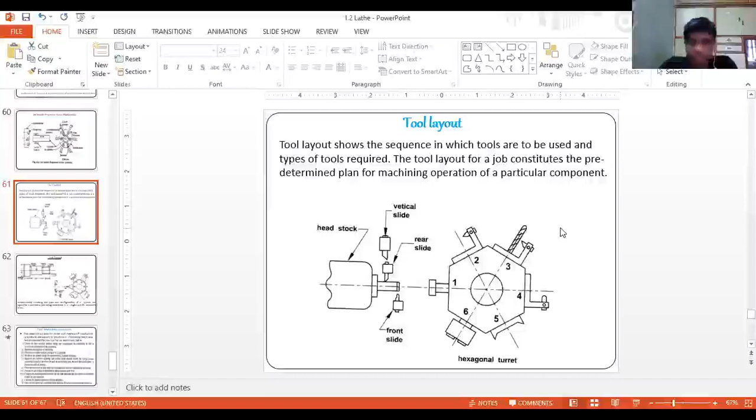So one small portion is left out. That is tool layout. So what is meant by tool layout? Normally tool layout is required for lathes, automatic lathes, or maybe turret and capstan lathes. So tool layout is nothing but, if you see in this picture, what is this? You can see this hexagonal portion.

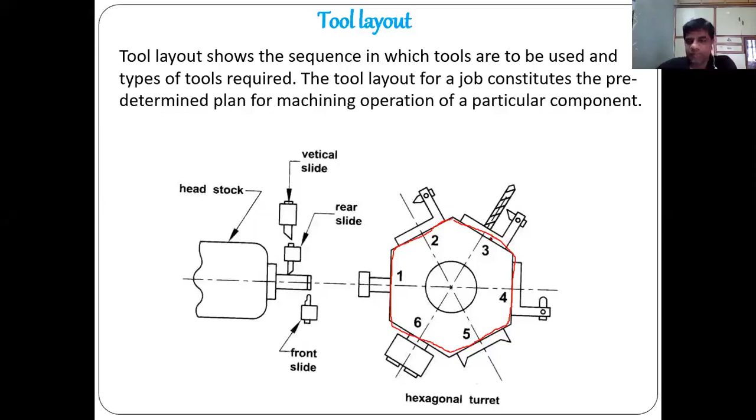Can anybody tell me what is this hexagonal portion? Last class we discussed this hexagonal portion. Can anybody tell me what this portion is? So we discussed some hexagonal last class, right? So this is nothing but the turret.

So you see, the headstock is clearly mentioned. This is the headstock, and this is the workpiece. This is a chuck, and in this chuck the workpiece is mounted. On the other side of the headstock, normally we have a tailstock on the lathe, right? But last class we have seen in turret, capstan, or automatic lathes, we replaced this tailstock with this kind of hexagonal turret. Sometimes pentagonal or octagonal turrets will also be there.

So in this turret, what happens? In hexagonal, we have 6. Actually, this is the top view of the lathe. Perpendicular to this screen, there is one more length. So this is actually a hexagonal block. In this block, 6 sides are there. Each side is a surface, and on each side we are mounting one tool.

In the previous lathe, we used to have a tailstock. In a normal center lathe or engine lathe, on the tailstock we normally fit a center, and that center supports the workpiece. One side the workpiece is mounted on the chuck, and the other side is supported by this center mounted on the tailstock, for very long workpieces. But for short workpieces, the tailstock is not required. So in capstan and turret lathes, they replaced the tailstock with this kind of hexagonal turret.

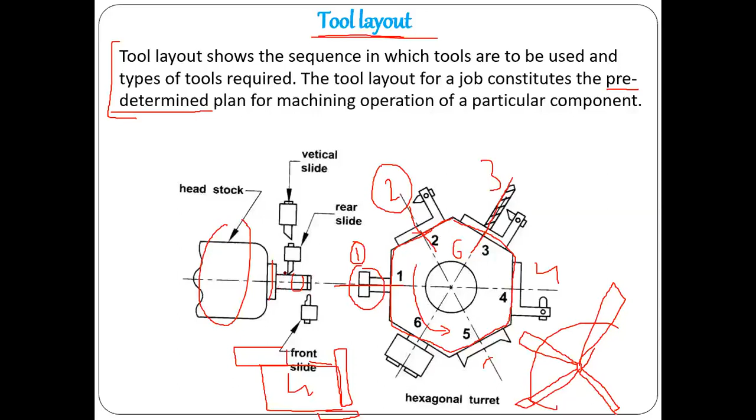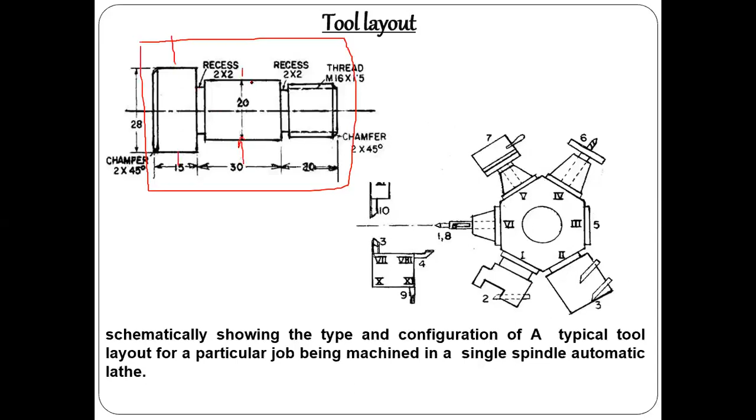So for this operation, you can take a workpiece of a particular diameter. Here it is 28 mm diameter. So you need to have a raw material of 30 mm diameter because some finishing has to be done. So 30 mm diameter, and how much length is there? Length is about 30 plus 20, 50, plus 15, right? So 65 mm is required. Maybe 5 mm more you can keep here. So if you take about a 70 mm length and 30 mm diameter rod, you can make this bolt.

So how do we make this bolt? Once it is inserted into the chuck, the operations are performed one after the other. You can see here, this is a tool post. For a square turret, the tool post is replaced with the square turret. So 4 different planes are there, and each plane has a different cutting tool.

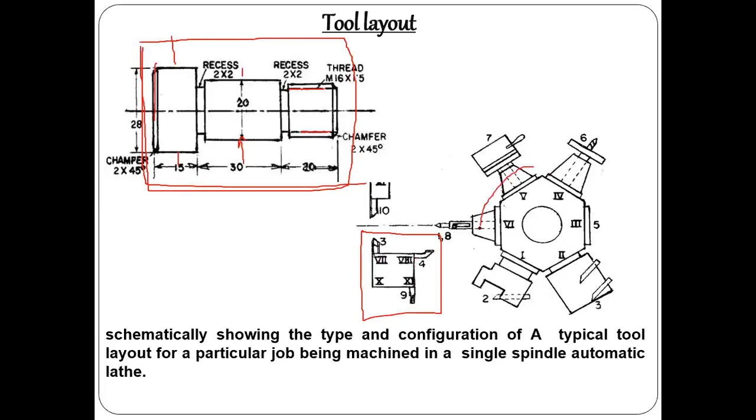Similarly, this is your tailstock. The tailstock is replaced with the turret. In the turret you have a hexagonal turret, so 6 different kinds of tools are there. Whatever operations you need to perform, these tools perform them as per the sequence of operations.

For example, I'm drawing one image here. This is nothing but the raw material we have, right? So we need to manufacture a bolt of how much diameter? The bolt diameter is 20 mm, and on that you need to have threading. An M16 thread has to be made on that 20 mm diameter, right? So this is the typical raw material you have.

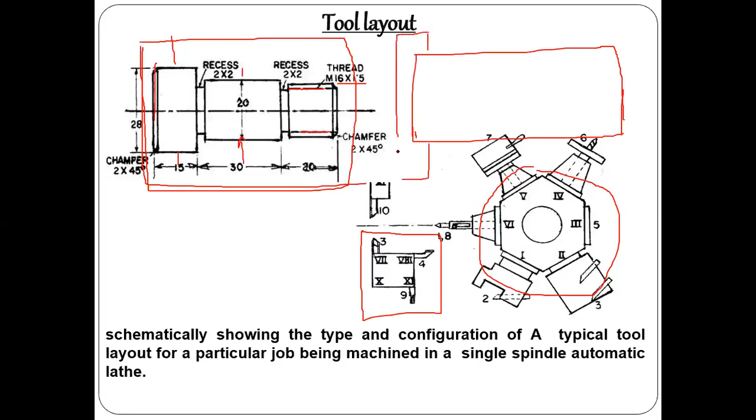So this you need to insert into a chuck, right? Whenever machining, normally the length of the workpiece has to be a little more, so that some portion can be gripped in the chuck. So assume it is 10 mm. 10 mm is gripped, and about 70 mm of workpiece is there. So initially you take 70 mm, and the diameter is about 30 mm. From this workpiece you need to manufacture a bolt, which you can see in this direction.

So this has to be converted into this one, right? This is production. What is production? Converting raw material into the finished good. That is called production. So this is also one of the production processes. So this is the raw material given to you: 70 plus 10, an 80 mm rod, 80 mm long and 30 mm diameter.

So from this you need to make a hexagonal bolt or a square bolt, whatever you can see in this picture. So how do you need to do it? Simply insert the workpiece into the chuck. The chuck is holding it. When you start the machine, it starts rotating, right?

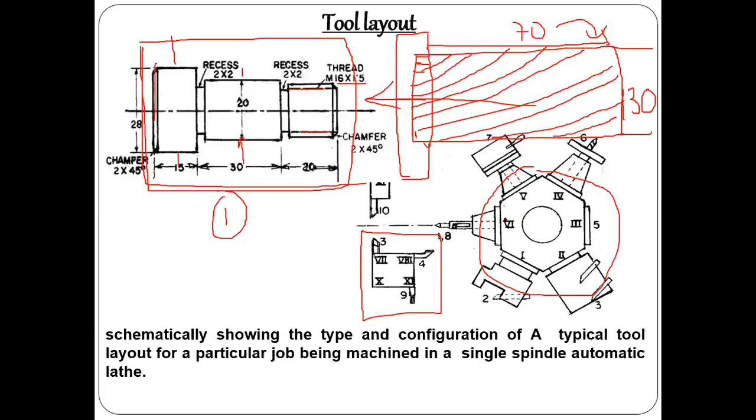Because this is only 70 mm, a short workpiece, we do not need any kind of tailstock. We do not require a second support. So the tailstock is replaced with the turret, right? So now which operations, in which sequence they have to be performed, as an engineer, as a designer, you need to decide, right?

So initially itself you've decided what kind of things you need to make. So initially you need to do the plane turning operation, you see here. So whatever tool is there, this is used for plane turning. So initially whatever the 30 mm is there, you need to reduce it to 28 mm. So entire workpiece you reduce to 28 mm, performed by one tool. So the first tool performs that operation.

After that, what we need to do? This portion remaining, you need to leave 15 mm because this is the head portion for holding, and remaining portion 30 plus 20. So this 50 mm diameter, 50 mm length of the workpiece, you need to reduce it to 20 mm diameter. After finishing this one, removing 15 mm, then remaining portion you need to reduce to 20 mm.

So there is a sequence of operations which you are performing. You reduce it, and the remaining portion you are cutting to this particular size, making it 20 mm. So after that, once you made that one, the second operation, what you need to do?

You need to make a threading on this. But before threading, because threading you need to have a different tool, some other tool is there. So this tool maybe is a threading tool. Once the plane turning is over, of entire portion, including this portion, then immediately you need to rotate this. When it rotates, this tool is coming this direction, and this tool is coming forward, ready for machining to make a thread on this.

But normally threading involves high forces. So in that case, even though it is a small workpiece, you still need to have a support. So here, one drill is there. Immediately after this is over, this portion comes forward and makes a hole in this. A small hole is made.

Then you need to have a support. So here maybe you have a center. This is actually not a cutting tool, it is only a center which supports the workpiece. So this workpiece, whatever goes back, this will come forward and hold with this. So this is the fourth operation, holding and rotating.

In that rotation, whatever tool is there, this threading portion is already coming here, and this starts making threads. So thread cutting operation is given. During thread cutting, simultaneously you are feeding as well as rotating. The feed is directly synchronized with the rotation of your workpiece. This is done because this is an automatic machine, an automatic lathe.

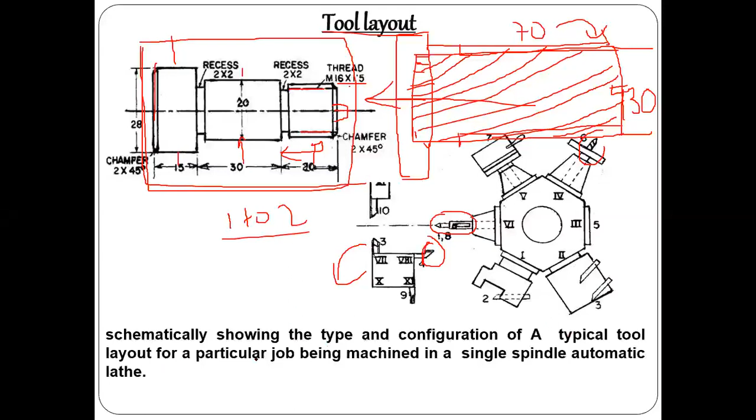So schematic showing here the type of configuration of a typical tool layout for a particular job being machined in a single spindle automatic lathe. Let me erase all these things, and assume the work is ready now.

From the raw material you have, you make this bolt. You see here some kind of numbering is given. When you're designing anything, you need to design the process also, which kind of sequence it has to follow. So numbering is given here and here, and as per that number, your operation is proceeding.

First is nothing but holding, because even though it is a smaller workpiece, you have a center on this giving it some kind of support. That's one. Second operation is nothing but making a facing, once you've given this support. The second operation is giving like this. You can see some kind of sequence of numbering is given.

1, 2, 3. 3 is here and also 3 is here. This means you can do the facing parallel - facing by this one and plain turning by this tool. So even sequencing also can be possible on this.

So tool layout is one after other, whatever sequence you are giving. Third one, then the fourth one is here - once your facing is done, this is a threading operation, so then after that you need to go for threading. That's 4. Then the 5th is one more - this one, nothing but finishing this face.

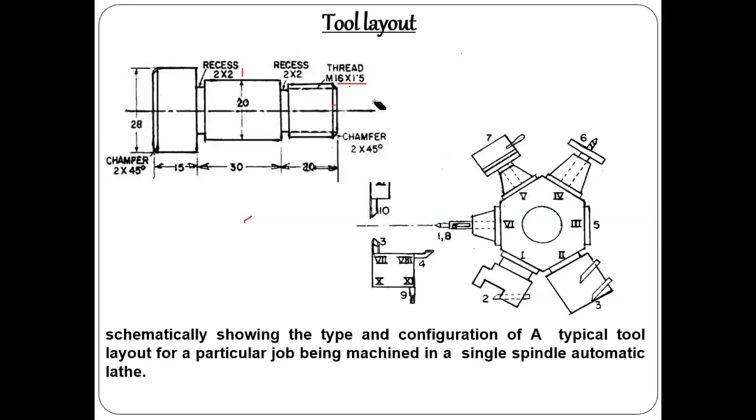So next slide, you can see detail about tool layout. This is something you can note down - a predetermined plan for order and method of machining operations necessary to produce it. Whatever the tool or manufacturing process or machining you are planning, that is given by this tool layout.

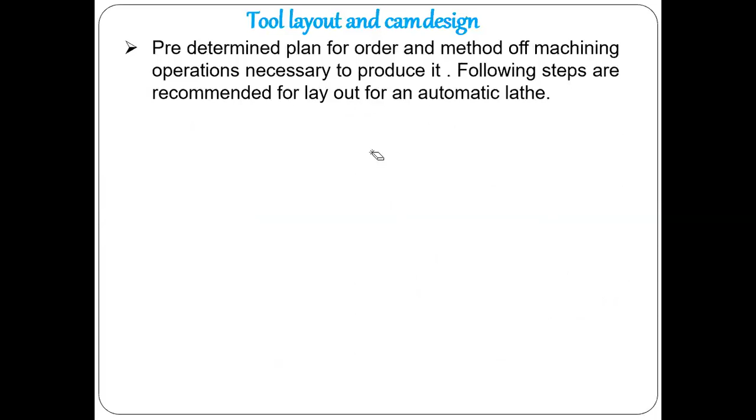Following steps are recommended for a layout of an automated lathe. For example, in an automated lathe these sequences of operations are involved - almost 10 sequences, step-by-step processes are involved. First, you need to choose the best available machine, right?

First you need to choose the machine, because when planning for manufacturing, in a factory or shop floor you have a number of machines. You need to decide which machine does which operation - which machine manufactures bolts and which manufactures other components. First you need to choose the best available machine, taking into consideration availability as well as economical manufacturing of the component - where you can manufacture fastest, what production rate you need, how much the product costs.

So based upon the accuracy needed, you choose the machine - what is the best available machine. Then determine the sequence of operations. This sequence of operation is based upon deciding which tool has to mount on which surface and side, whether it's mounted on the tool post or mounted on the turret.

So choose the available standard tooling as far as possible. Once your sequence of operation is decided, then you need to select available tools. Then decide on any possible design of special tooling if needed. If you're manufacturing a special component, you need some kind of special tooling - if that special tooling is required, you need to decide and buy it from the market.

Otherwise, you can give the order to manufacture special tools, based on the machine capability and surface finish desired. So decide the cutting process and the parameters for each tool to be used.

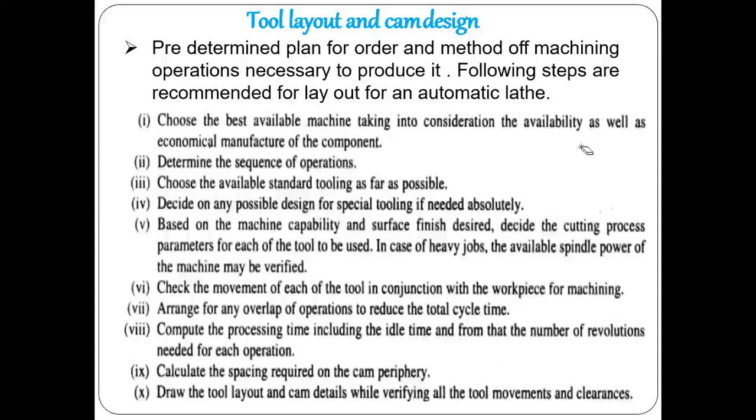Now it's coming to some specifications which we need to measure, so machining calculations. What we are seeing till now is different kinds of operations, description of lathe, different operations, holding mechanisms, tool layout - all these things. We're not looking at the problems yet. Now we are coming to the problems, so numerical problems also may come in lathe. In that, basically whatever parameters we have seen - we discussed this in the previous chapter on metal cutting, and the lathe is also one of the metal cutting processes.

So here also we have 3 different specifications required: speed, feed, and depth of cut. Speed is nothing but spindle speed - the speed at which your jaw, or your spindle, is rotating. Spindle speed can be called V, cutting speed, and also number of rotations. How many rotations your spindle or chuck jaw is making in one unit time, per minute or per second, is represented by N. So N is revolutions - how many rotations the spindle is making - and V is cutting speed.

So cutting speed is nothing but linear speed. So even though it is rotating at a particular RPM, some linear speed will be there at the surface. So that linear speed is nothing but your cutting speed. Then D naught is nothing but the outer diameter, the diameter of the workpiece when you keep the workpiece in the chuck. Whatever the initial diameter, that is given as D naught.

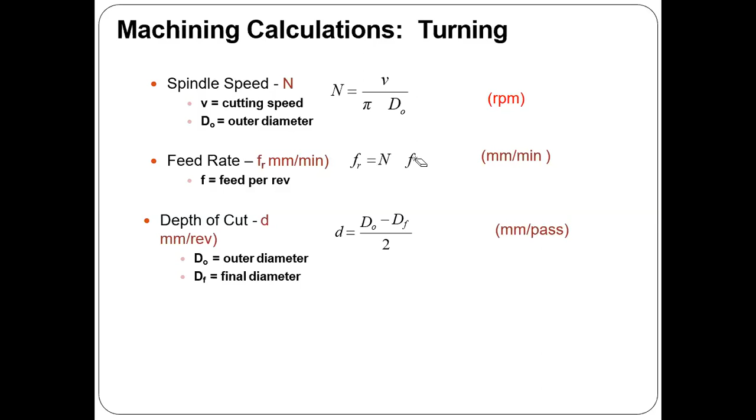Then coming to the important parameter in lathe, in any machining, is machining time. This is also the most important thing. When you're designing anything, how much time you take to manufacture the product, after how much time you're ready with your component, that you have to know, right? So machining time is a very important factor to measure.

Machining time is very simple: length of the piece divided by the feed rate, how much feed you're giving per unit time. That will give you the time of machining of a particular object. Because your feed rate is feed per minute, the time comes in minutes. If you give feed per second, then you get time in seconds.

The next important parameter is material removal rate: how much material you're removing from your piece. That's also one of the important factors. Material removal rate is very simple: your cutting velocity into feed, both in unit time, into depth of cut. Normally for other parameters, depth of cut we consider as d.

But here, if you're giving depth of cut on one side, because your workpiece is continuously rotating, automatically the other side of the material is also removed. That's why it's taken as 2 into d. So 2d gives you the actual depth of material you are removing. On the circular object, one side you remove depth of cut d, and the other side also d. That's why we take 2d.

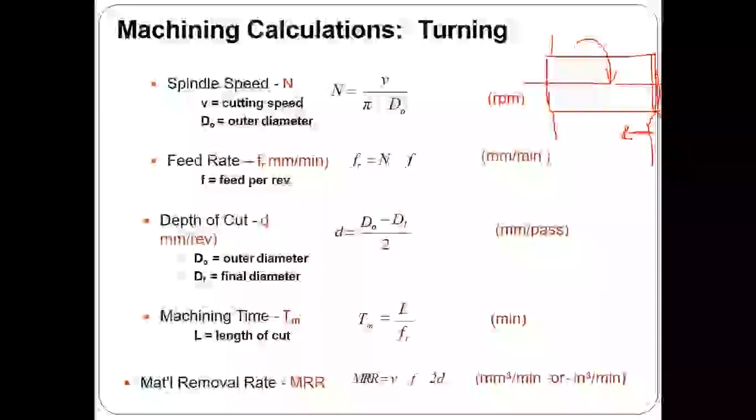So when the workpiece revolves once, how much you are moving your cutting tool in this direction is considered the feed per revolution, right? So at every revolution you're moving your cutting tool in this direction. For example, this is the starting position, and when it comes back to this initial state, one complete revolution is there. In that one complete revolution, how much the tool moves in this direction is your feed per revolution.

So in one revolution maybe you are moving about half a mm. That's feed per revolution. And how many revolutions is this workpiece making in unit time, maybe 1 minute? For example, it's making 30 revolutions in 1 minute, right? So 0.5 mm per revolution into 30 revolutions per minute means in 1 minute this tool moves 30 times in this direction, 0.5 mm each time. So 0.5 into 30 means about 15 mm you are moving in this direction per unit time.

So this is the speed at which your cutting tool is moving parallel to the axis, called the feed. And how much you are moving per unit time is called the feed per minute. Feed per revolution, f, multiplied by the number of revolutions per minute gives you the feed rate. Rate is nothing but per time, so how much feed you give in unit time, here a minute. So feed per minute is N into f. I hope the student has cleared his doubt.

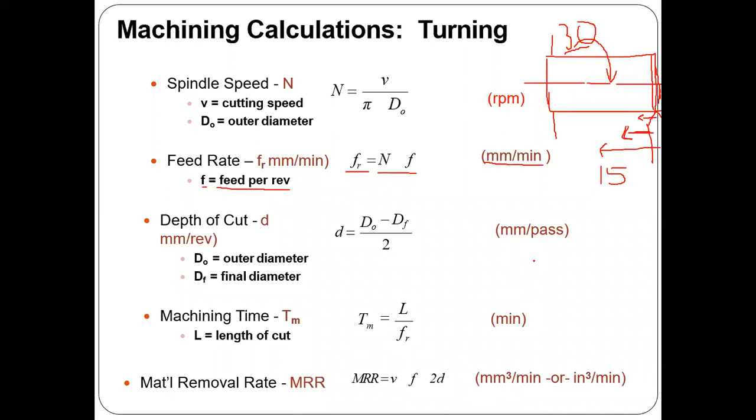Yeah, so now for still better clarification, we can take up one problem. With the problem, maybe you can understand still better. This kind of problem may come in your exam. A mild steel rod of 38 mm diameter and length 100 mm is machined on a lathe. So here a workpiece of 38 mm diameter and 100 mm length is there.

So raw material is available, and we need to cut it into the required shape. The feed is given as 0.1 mm per revolution, and the job rotates at 30 rpm, so the workpiece is rotating at 30 revolutions per minute. If the final diameter is machined to 35 mm in one pass, calculate cutting speed, feed per minute, depth of cut, material removal rate, and time for machining.

So all five parameters we've seen previously, they are asking now. So how to calculate? All the things are there. We have the initial diameter of the workpiece, the initial length of the workpiece, the feed per revolution is given, and the number of rotations N is given here.

So n is 30, and the final diameter is also given. So df is 35 mm, right? I think almost everything is given. It's asking about cutting speed, feed, depth of cut, material removal rate, and time for machining. So how to calculate? This kind of question may come for 5 marks or maybe 10 marks. It may not come for 2 marks because it asks for more parameters. But this problem is a very simple, straightforward question. There are not many complications in it.

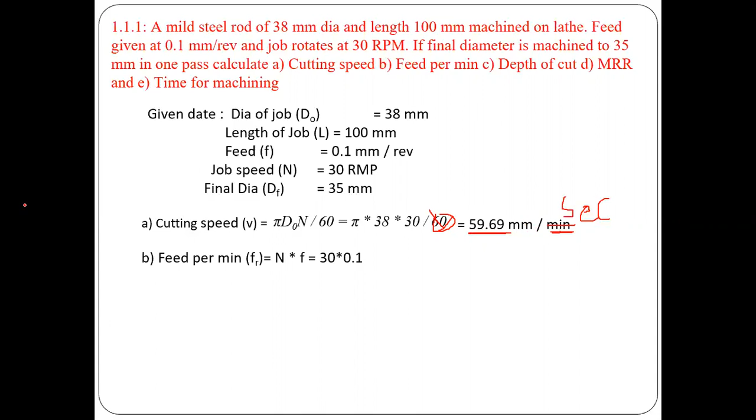Then coming to b, feed per minute. Feed per revolution is already given as 0.1. To calculate feed per minute, simply do n into f, the number of revolutions in 1 minute into feed per revolution. That will give you the feed per minute. So feed per minute is coming 3 mm per minute.

Right? Then coming to depth of cut. Depth of cut is normally per pass, not per minute or per revolution. In a lathe, depth of cut is given per single pass. Here the question itself says single pass, so in one pass the depth of cut is the same. Depth of cut is the initial diameter minus the final diameter divided by 2, so 38 minus 35 by 2. This value comes to 1.5 mm per pass. So for example, the initial diameter is 38 mm, right?

And final diameter is given as 35 mm. So if final diameter is not 35 mm, for example, final diameter is given as 30 mm or maybe 32 mm, then your feed may change. Normally feed is constant, but your number of passes may increase. So initial one pass, 38 mm is converting into 35 mm, and second pass 35 mm is converting into 32 mm. Means you need to have 2 passes. It's not in one pass; you need to make it in two passes.

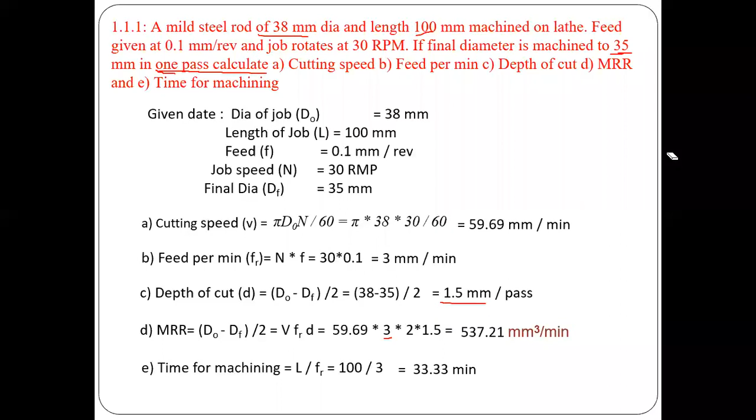Okay, let's move to the next slide. Since almost your syllabus is completed as per the syllabus, what I will do is take up my usual practice of going through last year's questions. You need to answer these now because these topics are all covered.

This first question is from the last year question paper, December 2019: differentiate between capstan and turret lathe, for only 2 marks, not 5 marks. This is one of the most common questions that may come in the lathe section, for 2 marks or even 5 marks.

So can anybody tell me what is the difference between capstan and turret lathe? We discussed this only in the last class. What is capstan lathe and what is turret lathe?

In the turret lathe, we can perform many operations, sir. Okay, in capstan lathe also we can perform many operations, right? Good. What about in the turret lathe?

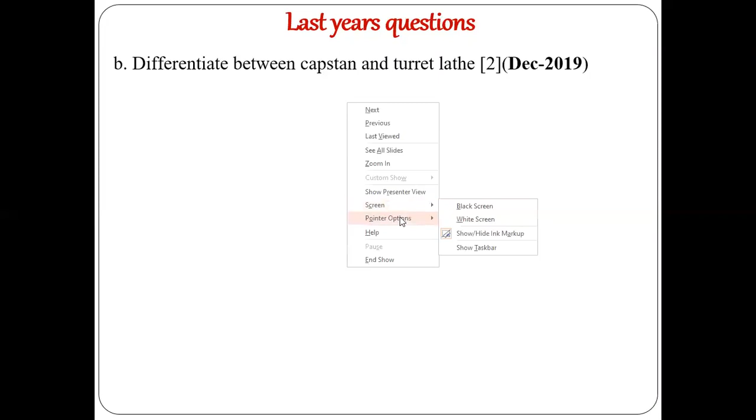For a 2 marks question, at least 2 differences you need to mention, 2 or 3 differences. So if this kind of question comes in the exam, it's always better, even for 2 or 3 marks, to make a table.

So make a table, write capstan lathe on one side and turret lathe on the other, based on whatever I mentioned in the last class. Make points here—at least 2, possibly 3 points you can give since this is a 2 marks question. So what are the three differences?

There are similarities too, like multi-tools can be operated at a time in both the lathes, capstan as well as turret. But what is he asking? He's asking about the differences, not the similarities.

So tell me, what is the difference between capstan and turret lathe? We discussed this in the last class. Capstan lathe is used for small workpieces, sir. Yes, exactly. Turret lathe is used for heavy workpieces and long workpieces.

Yes, exactly. Capstan lathe normally has a light construction, that's why it's used only for light, small workpieces, not robust or heavy workpieces. Whereas the turret lathe has a very heavy, robust structure, that's why we can use it for heavy, big workpieces. So this is the first and major difference between capstan and turret lathe.

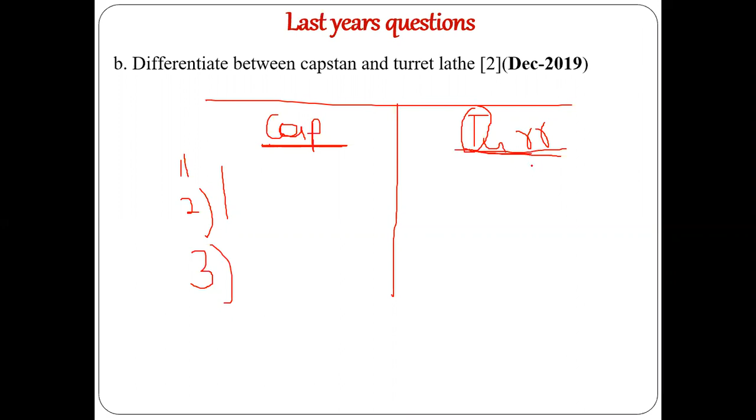Third difference—any other difference you remember? In turret lathe, I'll come to turret lathe first. In turret lathe, the turret is directly mounted on the bed of the machine, on the guide ways, directly mounted on the turret lathe.

Whereas in the capstan lathe, there is a secondary or auxiliary bed, and on that auxiliary bed you keep the turret. So in capstan lathe, the turret is kept on a separate bed, not on the same bed, because it's a light structure construction. That's why an auxiliary bed is required to keep the heavy turret.

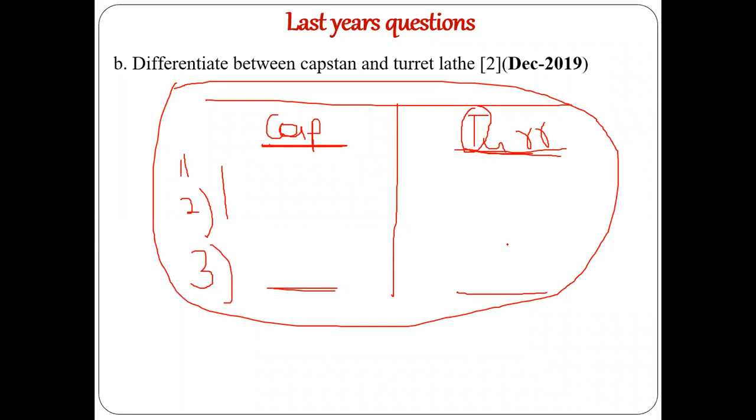So these are the three basic differences. If any question comes, even for 5 marks, you can add these 2 or 3 points. This is definitely a 2 marks or 5 marks question, and every year this question comes.

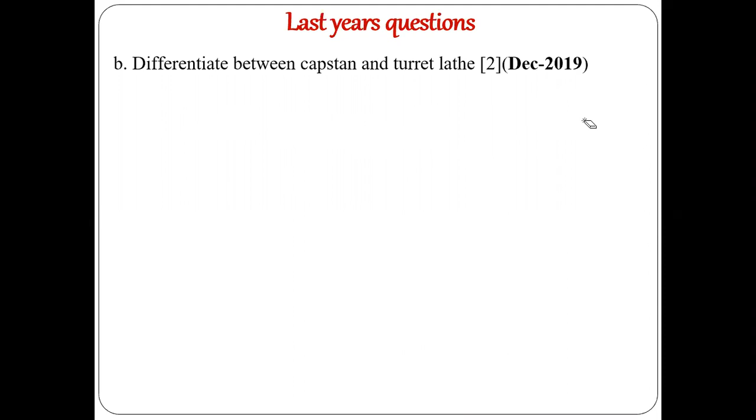So if anybody asks about differences, or comparisons, or classifications, that kind of word is coming, you need to make a table. One side one thing, other side the other. You need to show this. This is one more question, a 5 marks question that came in your last year's question paper.

So what is an automatic machine? It's not asking about automatic lathe, it's asking about what is automatic machine. State the factors which affect the classification of automatic machine.

This also we discussed yesterday. You see, in one class you're going to get 2 marks from there and 5 marks from here, so almost 7 marks you're going to get only from one class. If you miss even one class, see how much loss you have. 7 marks, if you attend last class and remember, recollect, then easily you can score 7 marks. This question paper is last year's question paper, December 2019. That one was 2 marks in Part A, this one is Part B question.

So can anybody tell me, what is an automated machine? What is an automatic machine? Whether it is automatic lathe or automatic machine, what is an automatic machine? Automatic machine means labor is not required, skillness is not required, process is faster. But what exactly is an automatic machine? This is called automatic machine.

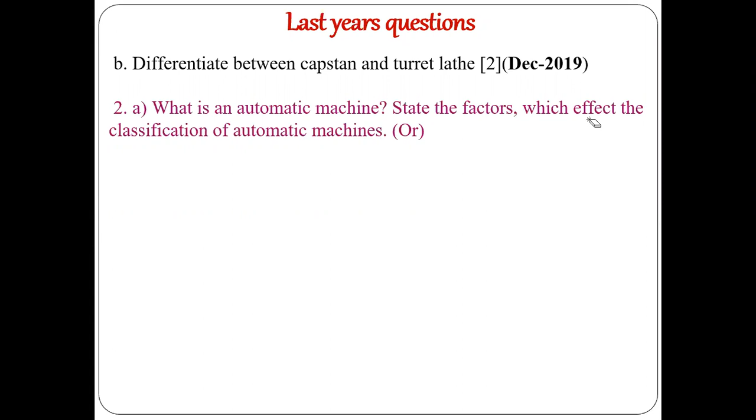So this is one question that has come in last years. आपके जो seniors थे उन लोगों का क्वेश्चन आया था. And one more question: briefly discuss about different types of taper turning methods with sketches.

ये हम उससे पहले वाली classes में discuss कर रहे थे, different types of operations on lathe. उसमें एक operation है plain turning, एक और operation है taper turning. तो taper turning में हमने 4 different types of taper turning process discuss किए थे. तो वो 4 different types क्या हैं? कोई बता सकता है?

4 different types of taper turning processes हमने last class में, उससे पहले की class में discuss किए थे. तो वो क्या हैं? याद है आप लोगों को?

So first one is swiveling of your tool post. Swiveling of tool post हमने देखा है. उसमें कुछ formula भी होता था, कितना angle आपको swivel करना है, कितना angle rotate करना है tool post का. That is given by bigger diameter minus smaller diameter divided by 2L, D by 2L. इस formula के according आपको अपना tool post swivel करना होता है. That is one of the methods of taper turning, swiveling of tool post.

Inside that you draw the figure, because it's asking about sketches also, so you need to show the picture, maybe taper turning. The taper image you can show, bigger diameter one side, smaller diameter one side, right? So that is one method. You can explain how you are doing it.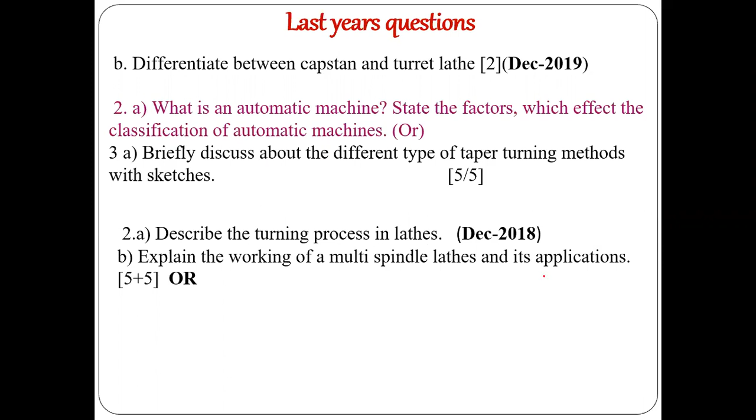So you need to make an image. Describe the turning process, and if you want, you can show it with an image. As I told you, in machining, in this subject, wherever possible you need to draw an image and explain with that. Maybe if you go back to my previous class, you can see it in your class notes or in your slides.

Last class is very important. Whatever we were discussing in the last class, please go back and refer to your class notes; if not class notes, refer to your videos, whatever is available.